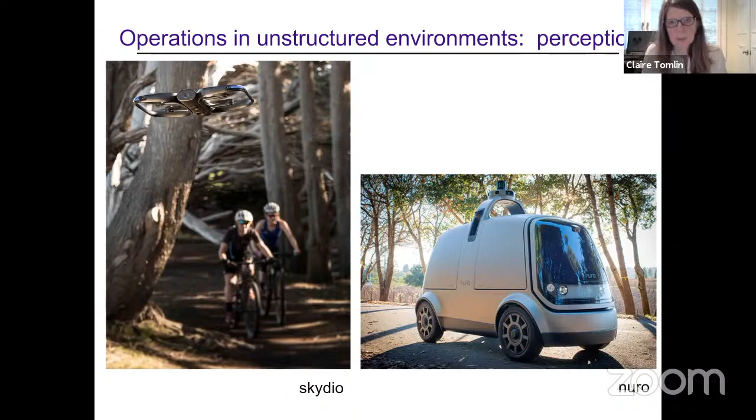And I think, from the point of view that I'm going to start with, which is a reachability point of view, it's been a nice framework to bookkeep information we know about the system and how it relates to safety. But it doesn't yet really address the kinds of problems that I feel like we need to address in learning-based, safe learning-based control, like those that come up in navigating in unknown environments.

Okay, so I'll start by talking about reachability. This goes back to work... I think one of the pioneers of thinking about reachable sets and control problems is Dimitri Bertsekas, who really formulated reachability from a discrete time point of view.

Our work in reachability started a long time ago with Shankar Sastry and John Lygeros and George Pappas. And then over the past couple of decades, both then and also in my research group, we've been trying to formalize it, trying to do computations in high dimensions.

But the idea has always focused on, given a model of the system, here represented as a differential equation with a state X, an input U, and disturbance D. You have this model F, which is assumed to be known. What you don't know about the system are these disturbances, but you assume you know some bound on the disturbance. So with that framework, let's talk about this from the point of view of safety.

So suppose you had unsafe configurations, like a collision set might represent that red ellipse that I've shown there. The backwards reachable set is, from this red ellipse, all states for which, for all possible control actions you can do to avoid collision, there's a disturbance action which can drive the system state into that red region, which we'll call G at time 0, in T time units. We call that set G of T, pictured here in pink. It doesn't mean those states will evolve into G of 0, but it means that if you're inside that set, even if you apply the best case control action to keep you out of the red set, a disturbance or just the dynamics of the system could force you into that unsafe region.

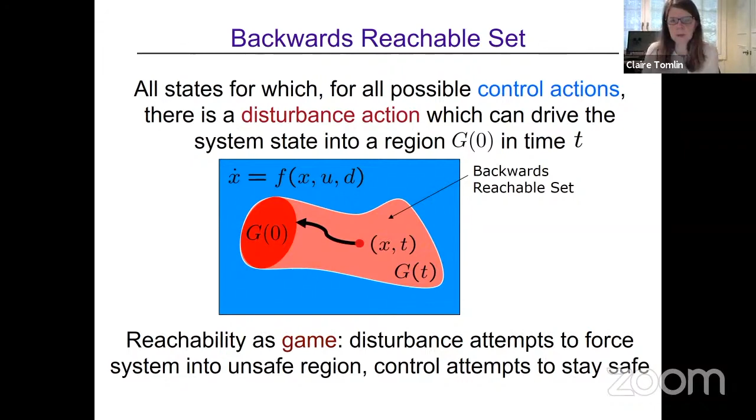We characterized this, building on a lot of prior work from others over the years. You can characterize the backwards reachable set as the sub-zero level sets of a value function or cost function, a Hamilton-Jacobi-Isaacs function, J of xt. That function solves a particular Hamilton-Jacobi-Isaacs equation, that PDE, shown there.

The min with 0 on the right-hand side is the unusual component, which enforces that if a state is unsafe at any time within that horizon, from 0 back to some negative start time, then that state has to stay unsafe. It's frozen at unsafe—it can't become safe at a future time.

Computing this requires, in general for nonlinear or hybrid dynamics, gridding—a numerical method that grids up the state space. A lot of work in our group and others has focused on developing efficient computational methods to solve these for reasonable or high-dimensional control problems.

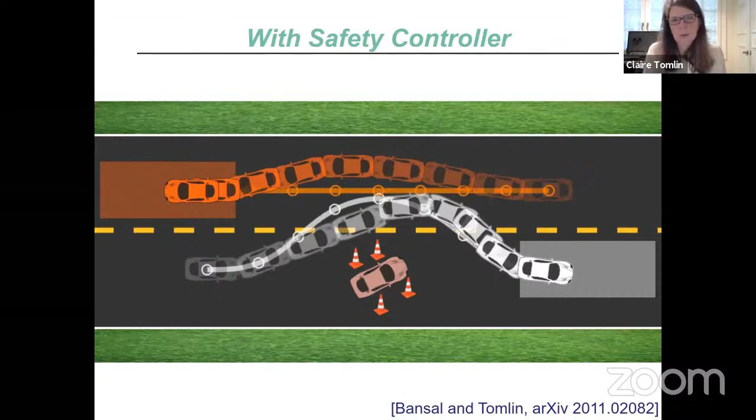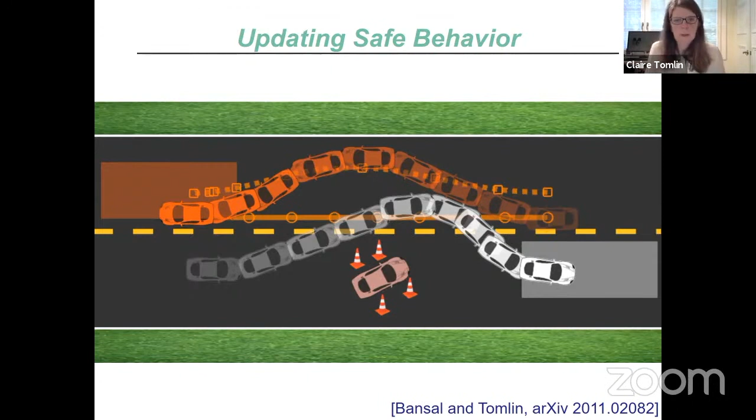Okay, and you can ask things like, well, what happens with different initializations? So you can query around the set and see the resulting safety controller based on that computed set. Okay, so that's kind of the introduction to reachability. And in recent years we've been asking, can you use these reachable sets in a safe learning paradigm, in this style that Melanie talked about in the session right after lunch.

The idea here is this reachability tool assumes you have a model of the system up to some unknown behavior in those disturbances. So what happens if you don't actually know your model, or what happens if the uncertainty in the disturbance is quite large? Can you use a pre-computed solution to this reachability problem, so that value function from the Hamilton-Jacobi-Isaacs solution, and scale it up or down based on information you're learning in real time about what the disturbance in the system actually is?

We call this online model validation, and it's joint work with Melanie, where we initialize the active unsafe set as the smallest candidate set from which you can guarantee safety. Then as the system evolves and you're gathering information about the model and the disturbances, you may see, for example, that you weren't being conservative enough, that at a particular state X at time T, the disturbance is larger than you had predicted.

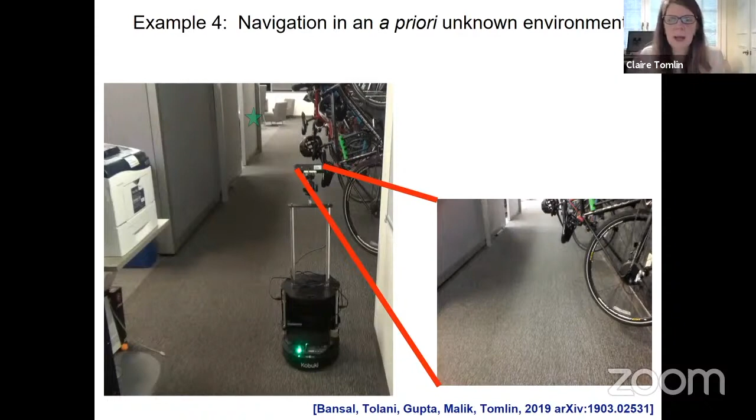The experiment we have in mind is a simple one. You have a robot with a camera, and it knows where it is and knows its goal, but it doesn't know what's in between. We train a perception module based on environments like the one it's in, which is like indoor university labs, and then we ask it to control itself appropriately as it gets images in real time about its new environment.

So we designed a modular architecture: a perception module, which is where the learning scheme is, combined with a planning module and a control module, where the planning and control modules are very traditional. We use a spline-based planner and a linear quadratic regulator for the control, and we assume we know a model of the system itself, so those are conventional model-based planning and control schemes.

The perception module itself is trained using simulation data and optimal control. We use an online database called the Stanford Indoor 3D Spaces database, which provides textured meshes of indoor lab environments of buildings on the Stanford campus. We train it with the location and shape of the obstacles known, so that the cost for our optimal control problem is a signed distance function, set up to reach a desired target while keeping away from obstacles.

Then we find a waypoint such that the resulting spline we compute minimizes the cost. So in our architecture, the output of the learning-based scheme is a waypoint, a next waypoint you want to go to, knowing where the final goal is—a point along the path to your goal. That's what the learning module does: it takes in images, and based on known inertials and a known goal position, computes the best next waypoint from a set computed.

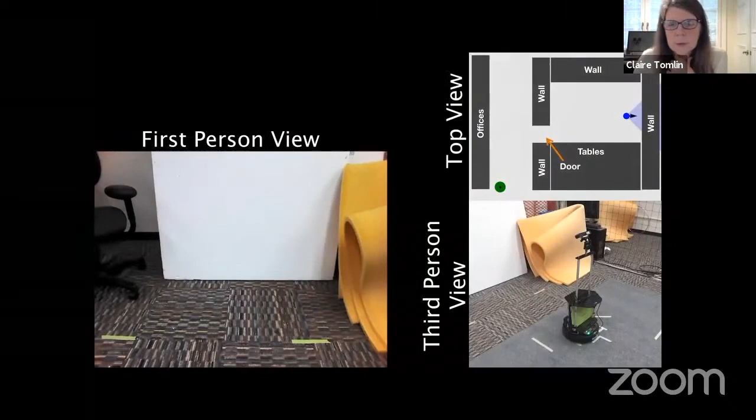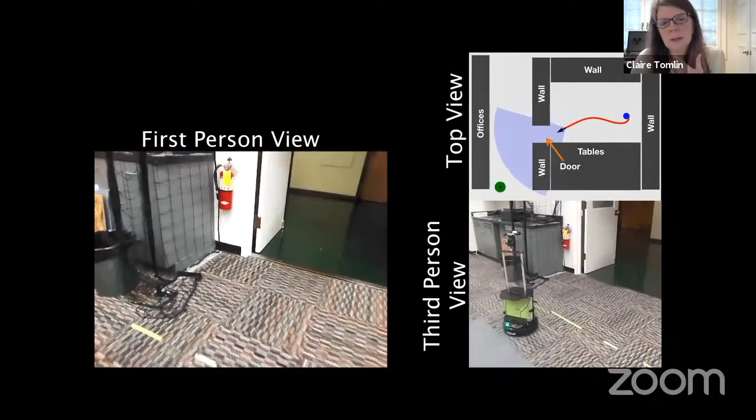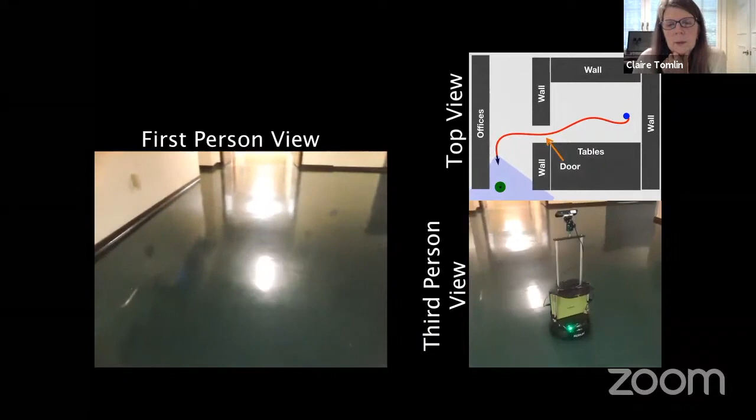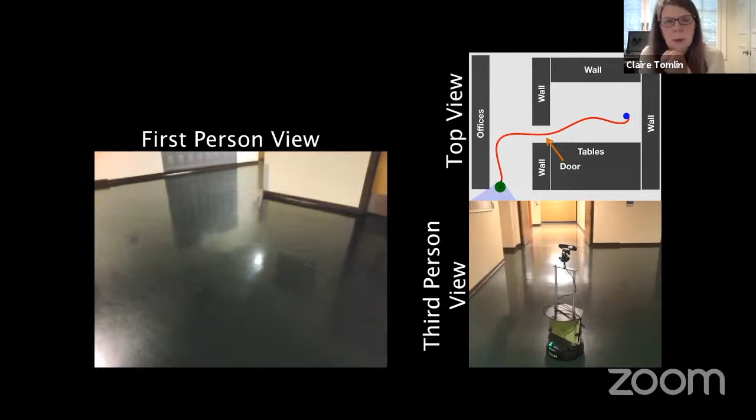We were able to show good results with this. This is from that CoRL paper, and you can see the first person view—this is what the robot sees. It's trying to get outside of a lab into a corridor. It wasn't trained on doors, but it was trained with a lot of data indicating that when you see this kind of configuration, look for a door to get out to where your goal is. Here, the nice thing to see is that glare on the floor—you're going from a carpeted room to a shiny floor corridor with a lot of glare, and that doesn't upset it at all. So we had a lot of these successes.

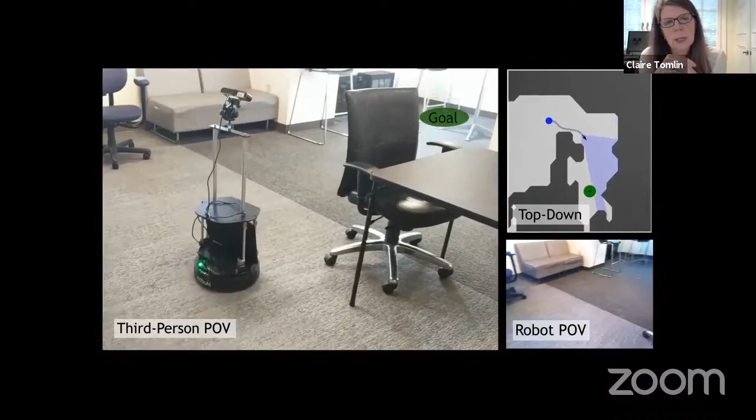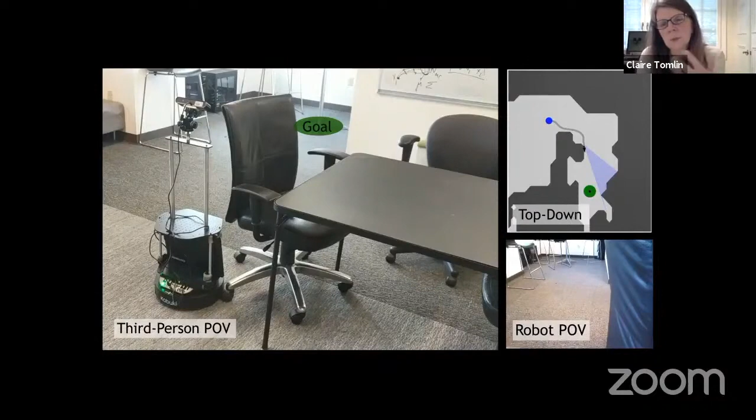But we also had some failures, and this is one of them. Here the robot is trying to get to a goal around the chair, and it just hits the chair. This is one of the failure cases we saw. So we started to ask how we might think about using reachability, or using our control tools in a kind of redundant way, to avoid these kinds of failures. Could we design a safe set boundary based on knowledge we're gathering in real time from the camera on the robot?

So we developed a separate channel. Using that same camera, we used subsequent images to develop a depth-based sensor of where immediate obstacles are. Then we used that to grow a safe space in the environment using a reachability-based calculation, and we did that in real time. That reachable set then acts as a safety verifier—when we're applying the LQR controller to our robot, it first asks, is this going to run you into a chair, or is this going to violate your safe space? If not, it allows it to continue. If so, it applies that safe control to use on the boundary.

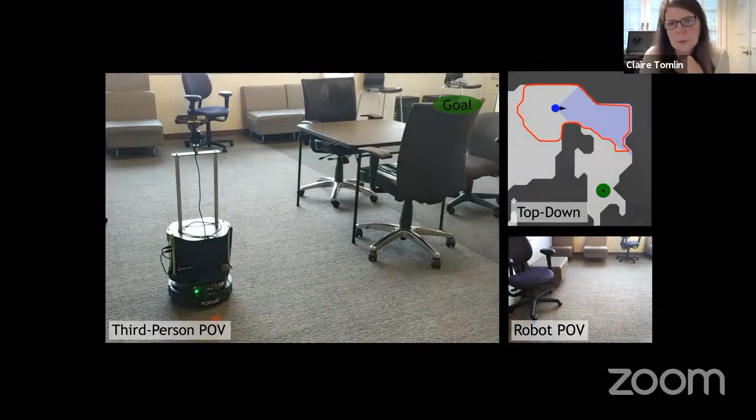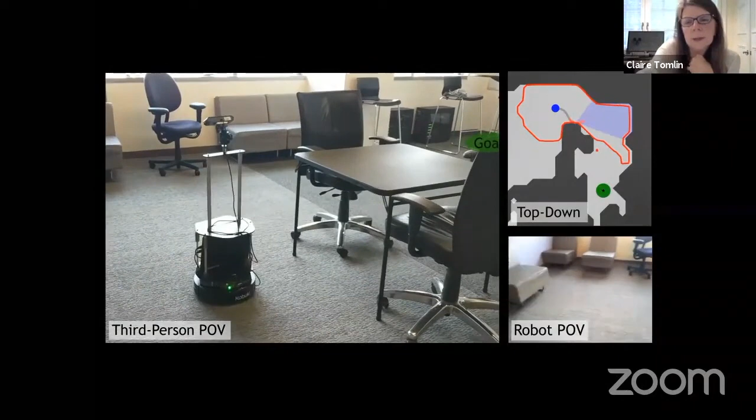Here's that same example, and what's a little different is you see in the upper right-hand corner we're plotting that growing safe region of operation. This backwards reachable set is actually the complement of the backwards reachable set from the obstacles—this is work Somil and Andrea Bajcsy worked on. You can see there's where it would have hit the obstacle, and that's where it would have hit the boundary that would have led it to the obstacle, and it's being guided away by that safe control on the boundary until it goes back in and gets to the goal.

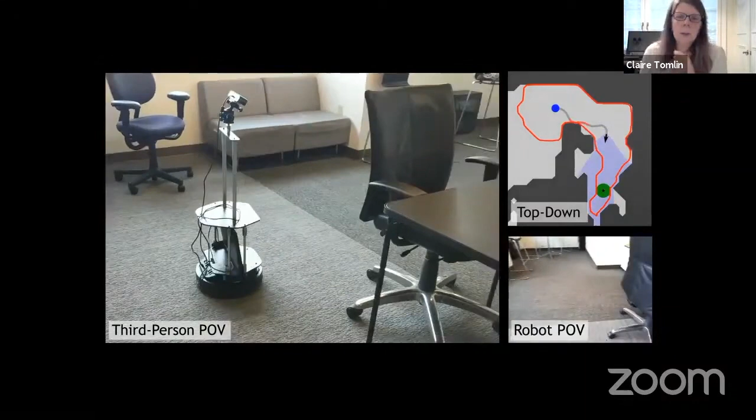Let's end by talking about a few challenges. These are, when I said open questions, really exciting things to think about from the point of view of safe robot control as you're learning in real time—not Lipschitz continuous disturbances, which we worked on before, but learning about the environment, or about somebody moving around in the environment, or having to interact with somebody and learning their characteristics so you can interact properly with them. So anytime you have a learning-based component, how do you know it isn't going to fail? How do you make some guarantees about the behavior, and can you have a control safeguard that monitors the behavior of that system?

One possibility is to have a monitor on the inputs to the learning-based component. Theoretically, you know something about the training distribution for that component—maybe you can model that training distribution. Then in real time, you can ask: are the images I'm getting in distribution or out of distribution? And if out of distribution, do we have some kind of safeguard? There are also questions about what uncertainty means in these learning-based components. In our case, our learning-based component gave a waypoint as an output, so what is the uncertainty around that output?